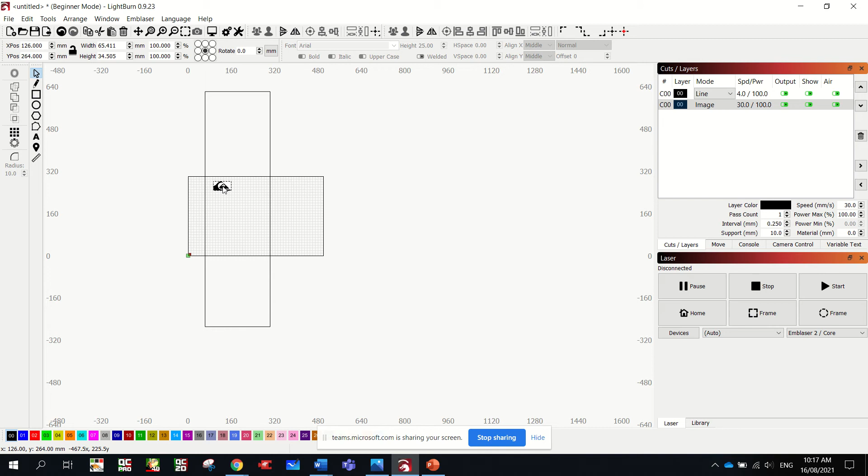Resize it. Probably want it a bit smaller in case I have to sand the edges of my board.

I can hold Shift on the keyboard and click the rectangle, so they're both selected now. I've got some align options here, so dead center and dead center. Okay, now click off it, click on it.

I can go to Tools and Trace Image, and it puts that pink or purple line around parts of the drawing. When I'm okay with it, I'll click OK. If you want to adjust it, you can adjust it to get it even sharper or however you want it.

Click OK. I'm going to click on the background of it - I'll zoom right in, click on the background, click Delete, and I'm left with that logo.

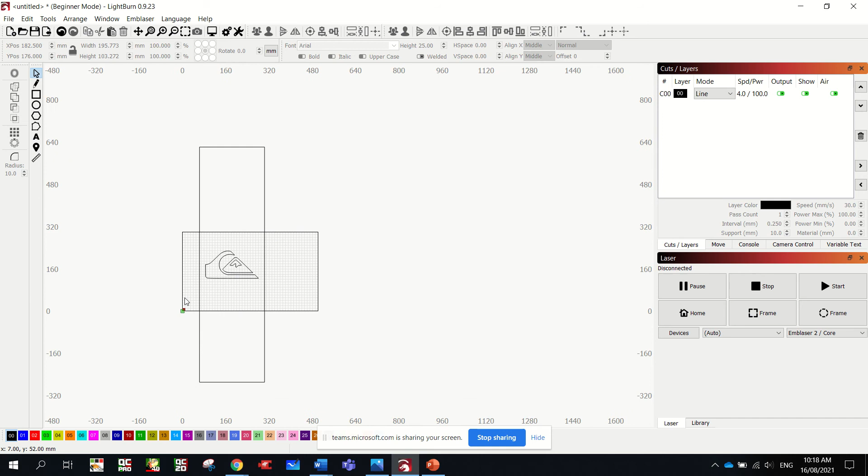Now if I click on here, it's going to tell me the height and width, and I can go, yep, that's going to fit on a sheet of veneer because I said the sizes were 200 by 250, so that'll fit. And the space around here, I need to do something with it.

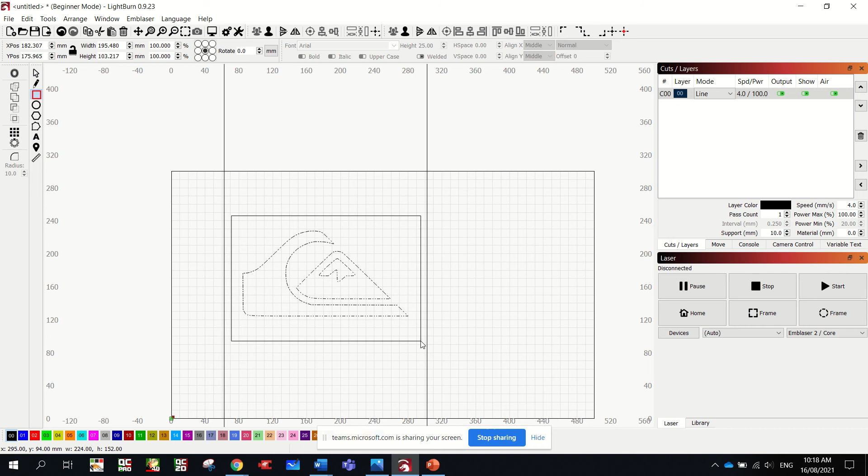So you could just go the repetitive shape idea, or you could put a rectangle around that part and then do something different out here. So you might just start.

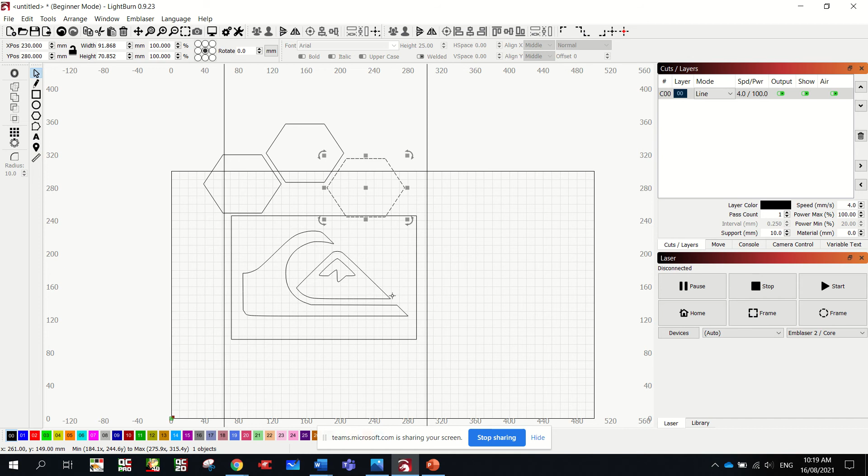Remember, every piece will be cut and stuck individually, so you might think, oh, I might actually make it a bit bigger to make it easier on myself. Copy, paste. Paste. And you might start designing that to fill up the space.

Now, where you've got overlapping sections - say I wanted to put one down here, copy, paste - it's a bit tricky. But you can manipulate things. It's not overly straight, but it'll do for the sake of the demo.

Escape. Oopsies - you can go pointer tool, right click... nope. Edit nodes, and then I think you hover over the line, you have to be perfectly on it. And there is a way to delete it - I'll send you a separate video of that, of how to trim lines off.

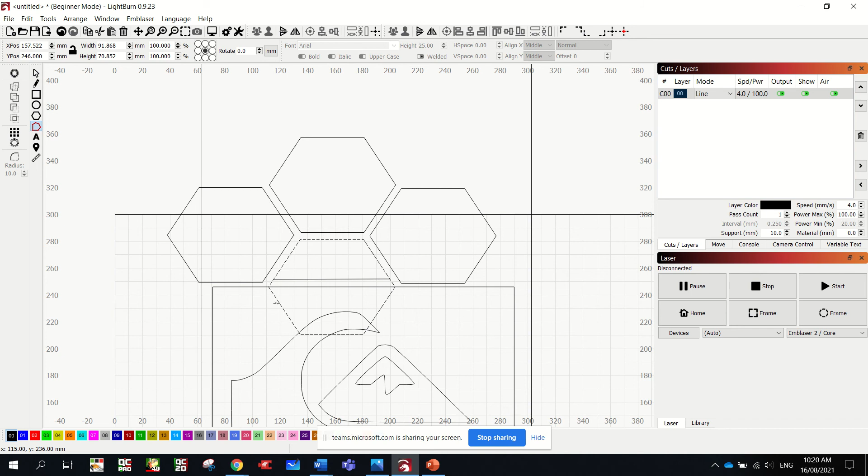Okay, but please, in Lightburn you can start designing the underneath of your skateboard deck to be whatever you want it to be. And then once you've got your design, you need to break it up into separate parts. So what do I mean? Well, instead of this being one whole image, this has to be one part.

I have to be able to select it by itself. This I have to be able to select it by itself. Same for every single part, so that we can tell the laser to turn off and on for certain parts. So how do you do it?

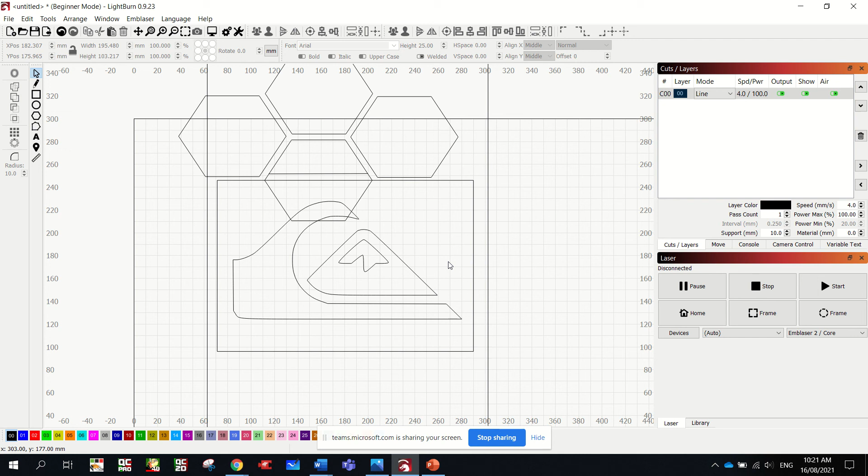Click on it. Click the silhouette of the person, which says ungroup selection. Then when you click off it, click on it, you can select individual parts now. And you want to make each part a different colour - so that one's black, I'll go to the next one out, make it blue, the next one out, make it red, next one out, make it green.

And what it's done is created a separate layer for each one. So I can tell the laser to just output the black layer, so just cut that one, or cut the blue one at the same time, and so forth.

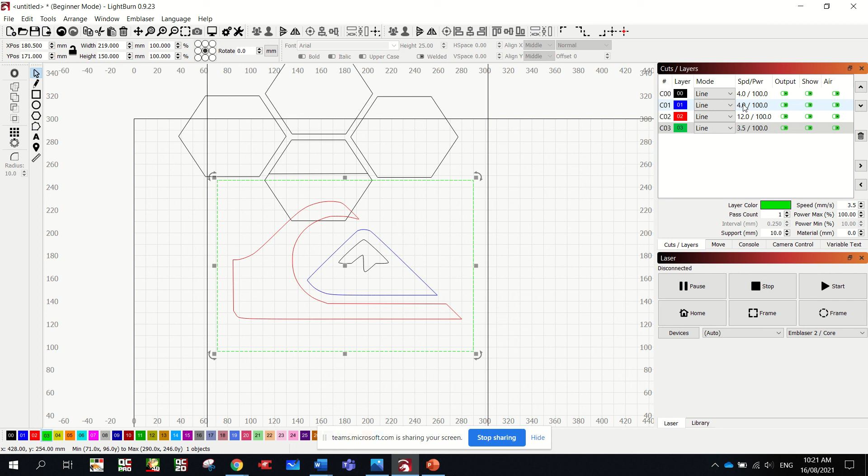Your speed and power settings, I'll do that for you when you send it to me, but you need to have all your layers set.

These parts you could probably just do as one layer. So you can click one, hold shift to multi-select - you might make them all one colour.